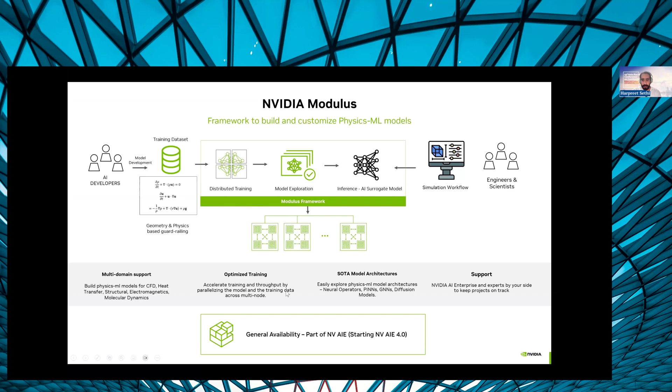And this package is available as a part of what we call the NV AIE license. And also this package is open source. A lot of different research organizations and also people in the industry have used this package to develop different solutions. In the energy industry, people have used it for wave simulation, CCS problems, and here you see some wind farm simulations and heat boiler plants. And there's a lot of work we did in the climate and weather space.

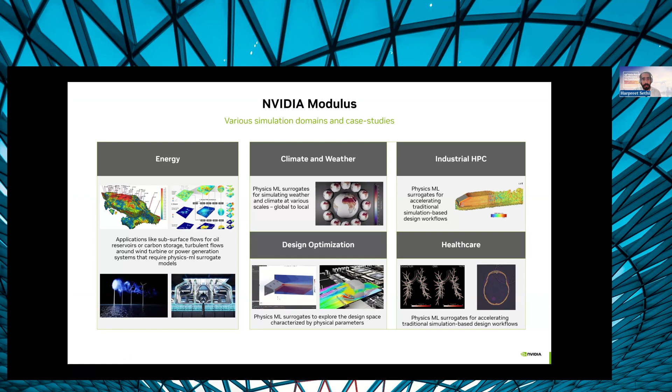And this has also been used in our own internal research for designing chips and heat sinks, and in medical healthcare, like blood flow simulation, MRI imaging, and also CFD simulations around cars. So there are many different fields where this package has already been adopted. There are a lot of examples available in this package you can use as a starting point. And I will point the link out at the end with the GitHub.

On one end of the spectrum, you have fully physics-driven models called physics-informed neural networks, and on the data-driven side, one of the models I'm going to talk about is graph neural networks. But we have other models available: neural operators, diffusion models, physics-informed graph neural networks, physics-informed neural operators, and many more. And we are also planning to release maybe one or two foundation models for simulation purposes. So it's an evolving package with a big team behind it, but it's still open source, so anybody can use it to accelerate their own research.

So now coming to this one particular model called graph neural networks. I'm going to start with what these graph neural networks are first. You might be familiar with normal neural networks. Basically, graph neural networks are just a way where we use a normal neural network and adapt it to a graph type object.

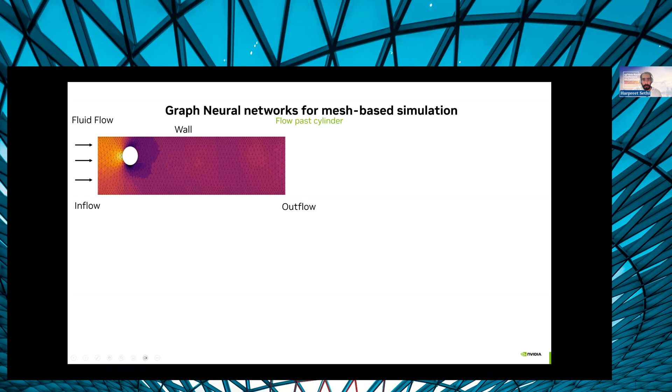So how can these graph neural networks be used to develop surrogates for mesh-based simulation? The first step is you have this information available from your numerical simulations. As I mentioned earlier, this is a data-driven approach, so you need to generate simulations for different types of meshes. Assuming that you have some simulations available, you have pressure and particle velocity information available.

In this case, we also have another feature called node type. A node type is a one-hot encoding vector. It tells you where the node lies, whether it's close to the inflow region, outflow region, wall region, or interior region. So we have four classes. If it's close to the wall, I'm going to put my node type vector as 1000. Depending on which region it is, I just change the 0 to 1 for that region.

Other information available from your numerical simulation is the position vector, so you know where each node is located. The first step is how you encode this information on a node or on an edge of a graph. In this case, we encode pressure, velocity, and node type as node features, and the positional information as the edge feature. I won't be able to go into detail on exactly how a graph neural network works, but I'll mention some important points.

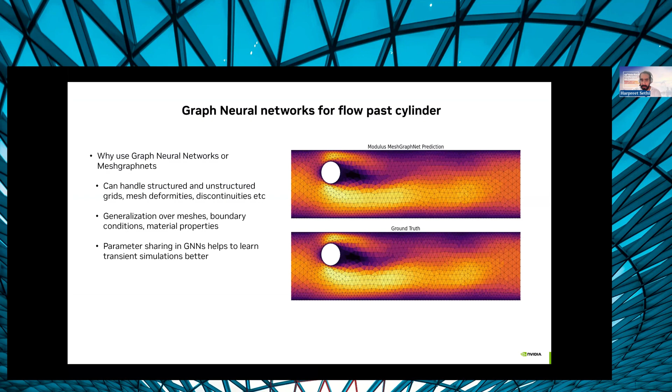So one of the main reasons is it can handle unstructured grids and very complex meshes. You are trying to adapt to unseen meshes, so you can handle deformities, cavities, and faults. In CCS, we are interested in faults and fractures, and these are really suitable for very complex meshes. You can generalize over meshes, different material properties, different boundary conditions, and these are also very efficient methods. So these are some of the reasons why we chose graph neural networks over other ML models, and the main reason was the ability to handle these unstructured and deformed meshes.

So now coming to the CCS part of the presentation, why it is important for NVIDIA and NETL. And the reason is because of the climate task force goals.

And so these are some of these goals toward basically decarbonizing, and that is the reason we started looking into how AI can be used for CCS applications, and how we can monitor our reservoirs and keep the CO2 stored safely in our reservoirs.

And these are more details on the actual site that we used to train our AI-based surrogate models for CCS. So this site is actually based in Illinois State in the US. And this is actually a real site where people have injected almost 1 million metric tons of CO2, and the actual depth of the reservoir where we are storing the CO2 is roughly 7,000 to 8,000 feet deep. And we normally store this in a thick and porous sandstone.

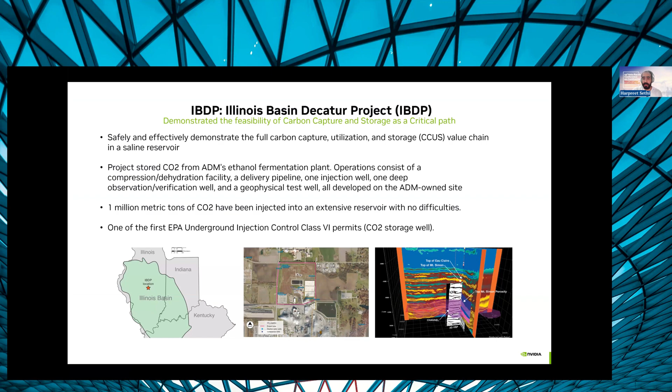And these are some numerical details on the type of grid that is involved. So it's not a regular grid. You can see it's a tartan grid. This is a deformed type of grid, but eventually we want to be able to handle faults and cracks and these types of grids. So that was the reason we chose graph neural networks.

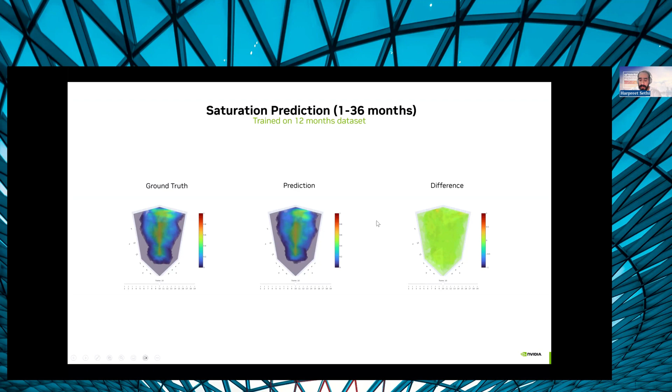So in this slide, it shows you how accurate our graph neural network was in comparison to the numerical solver. So in this case, we only tried a vanilla graph neural network. These are the results from maybe the beginning of this year or end of last year. So this was one of the first experiments where graph neural networks were tried on a real data set, and we only achieved an accuracy of 93%. But now we have developed more advanced models called graph transformers, which are also available in Modulus.

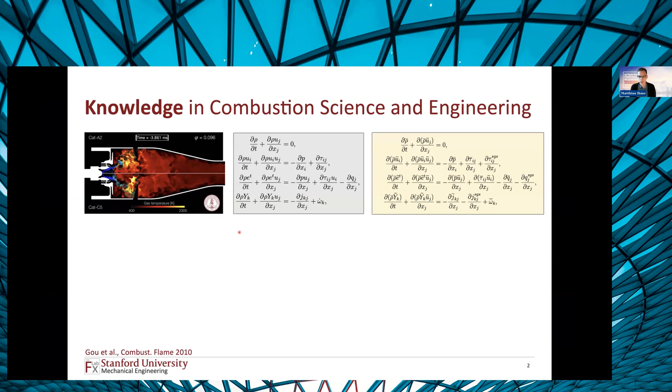What I'd like to present is a couple of snapshots on the general topic of machine learning or AI for combustion and energy. And I want to start out by reminding us that in our community, more broadly energy conversion and sustainable energy utilization, we actually have quite a bit of fundamental knowledge of the governing physics. And this is reflected here on this slide, where I'm showing examples of governing equations that are used to describe complex fluid flows.

The challenge, of course, despite this very fundamental knowledge, arises from its practical implications. If you look at one of these gas turbine combustors here, you observe that there are different physical processes that come into play. In addition to this, if you consider turbulent reacting flows, we have to deal with multiple length scales that go all the way from the molecular scales to the system level scales, and covering this with conventional CFD simulations introduces a challenge.

Apart from this, if you're looking to these equations, which are essentially some filtered form of the equations, you are observing that there are a number of terms appearing that are essentially just a consequence of our averaging procedure. So this is typically referred to as subgrid scale terms that require modeling.

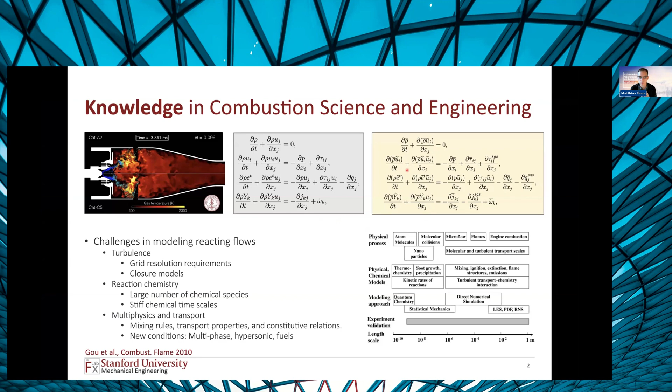So based on all of these physical processes, we can really think that the scales, unclosed terms, and the multiphysics constitute a number of challenges for which we have some understanding, but we really believe that data-driven methods can help us to make a leap forward to tackle some of these processes. And what I'd like to show you in these few slides is some approaches for dealing with some of these challenges.

Apart from this, what we're also recognizing is that there are more and more sensors and diagnostics coming online that are useful for diagnosing combustion performance, and this adds some additional opportunities for us. And lastly, of course, our extensive database from experiments as well as simulations can be utilized to extract additional knowledge and perhaps tackle some of the challenges that I mentioned before in terms of scale separations, multiphysics, and unclosed source terms. So by and large, the question then is how can we combine our existing knowledge and available data in order to make a leap forward.

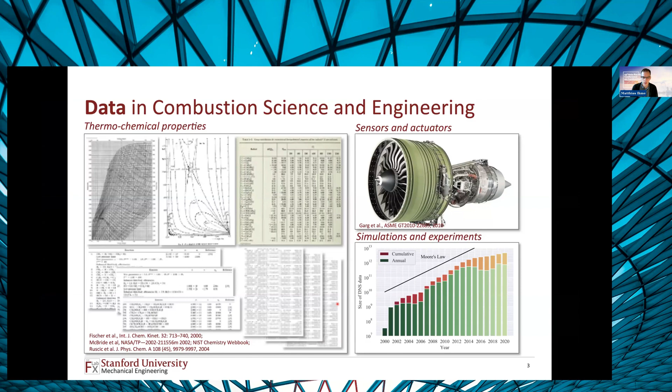And what I'd like to do here is to show you a couple of snapshots on different aspects. The first one is essentially a data and open source community-driven approach, where we're really thinking that this data that is available, typically dispersed within our community, should be combined so that we have access to this data for numerous data-driven methods. Depending on the time, I want to briefly touch on the use of these large data sets for extracting physical knowledge. And then I want to give you some ideas on how we can combine physical understanding and data-driven methods in order to tackle problems for which we have very limited capabilities to comprehensively investigate those.

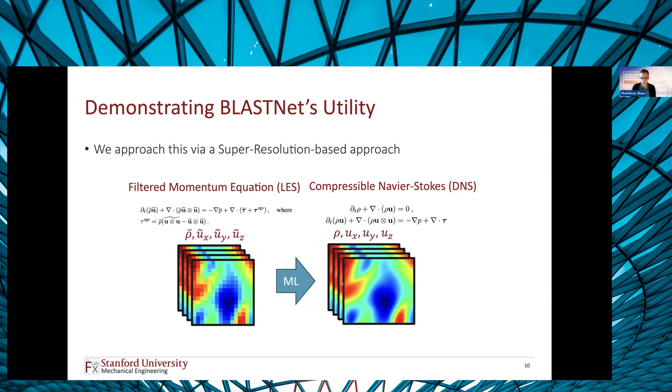What you're finding is that if you're using this BLASTNet dataset with one particular subset of data that we refer to as momentum 128, we can filter this data at arbitrary order and obtain information about the diversity. The diversity is a good indicator of how spread this data set is.

And this alludes to this idea that if you're developing a machine learning model, it provides you access to general data. And if you have a diverse data set, we're not running into the issue of potential extrapolation errors or hallucinations. So diversity is really helpful, especially if you're thinking about developing machine learning models that are generic, that are applicable to a wide range of operating conditions. And this is where we think that this BLASTNet dataset provides quite a bit of value.

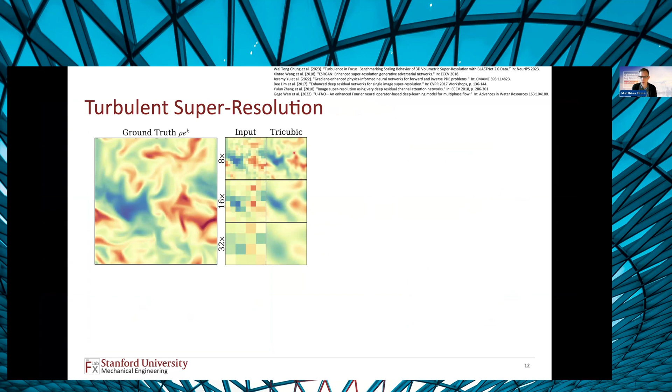And if you're doing a naive tricubic interpolation, that's kind of a standard approach, we are recovering some of the solution fields. What you can also do is train a number of different machine learning models. They have different acronyms, residual and residual dense blocks.

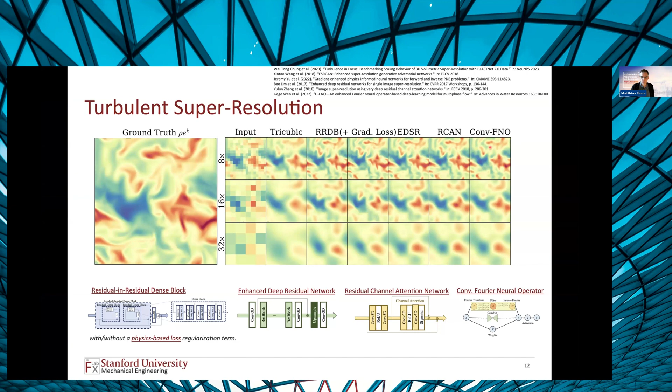We have the enhanced deep residual network and other formulations all the way to a Fourier neural operator. Now we can test the performance of different models, and we can ask questions how different models scale with regard to the number of data that we provide, or how the different machine learning models scale with the size of the systems or with the number of degrees of freedom. And I think that's really an exciting opportunity for us to look to asymptotic limits in different machine learning techniques, right? Again, illustrated here, just one snapshot of this.

Just as a side note, if you have a singular data set, you cannot test this because you're ultimately running into the issue of overfitting your machine learning model, right? So the results that we're getting are quite exciting because you are now able to observe trends, asymptotic limits, and this is essentially in performance metrics where we can now assess asymptotic performances of different models and really nudge towards this idea of generating foundational machine learning models for combustion.

Okay. So with this, let me briefly summarize here. So BLASTNet is a community-driven effort in order to bring data from diverse data sources, most notably from high-fidelity DNS simulations, in a central repository where we as a community can use this for different machine learning tasks. There are clearly opportunities to grow this data set in different directions. Currently, it's mostly focusing on turbulent fluid flows and turbulent reacting flows, but we could equally envision that this expands to experimental data as well as biofluidic flows, environmental flows, and related applications. Right. So I think this is a really exciting perspective, and I encourage everyone to consider contributing to this database.

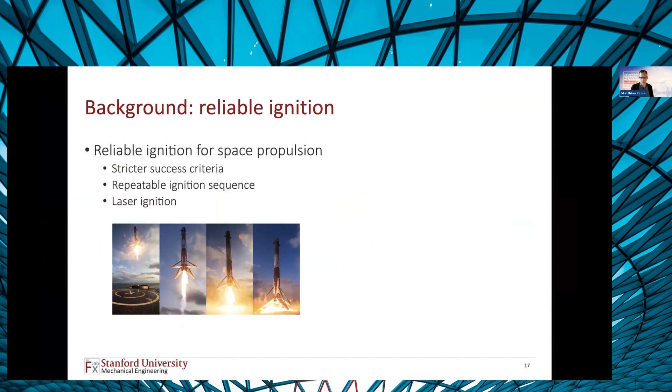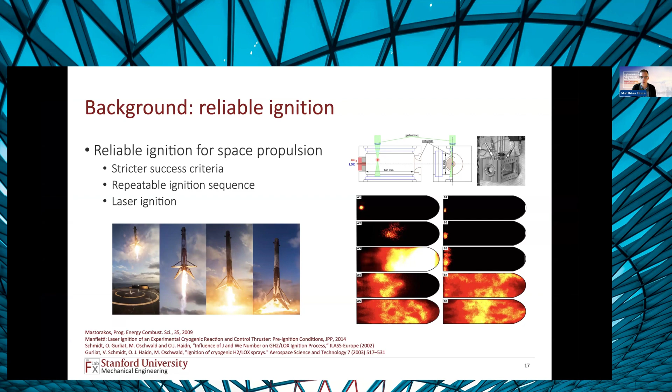You can imagine that if you're igniting in regions where you have only fuel or oxidizer, ignition is very unsuccessful. And so what we're trying to find is predictive methods on how we can position this laser, this ignition source, so that the ignition is always 100% guaranteed. Okay. So it turns out that if you're doing these kinds of experiments, it is an extremely challenging combustion environment, and you typically have only access to a few experimental data. So in our case, these are on the order of a few hundred unique experiments.

But at the same time, if you're thinking about performing high fidelity simulations, again, we are limited by the number of ensembles that we can access, right? So we kind of have a limited data set and we have limited computational capabilities. And then the question is, how can we marry both in order to get an ignition map with minimal availability of data, right?

So this is really extrapolations in the sparse data limit. And what I want to show you here is an interesting attempt to combine this so that we have predictive accuracy. Right, so what you're finding here is, as I said, ignition is limited by the turbulent mixing, by the unsteadiness and the stochasticity of the combustion process.

And what we would like to do is combine single or sparse high fidelity simulations. And this is shown here on the right-hand side. This is one CFD snapshot of cold flow simulations. This essentially provides us the fluid dynamics and the flow field behavior. In addition to this, we have sparse experimental data.

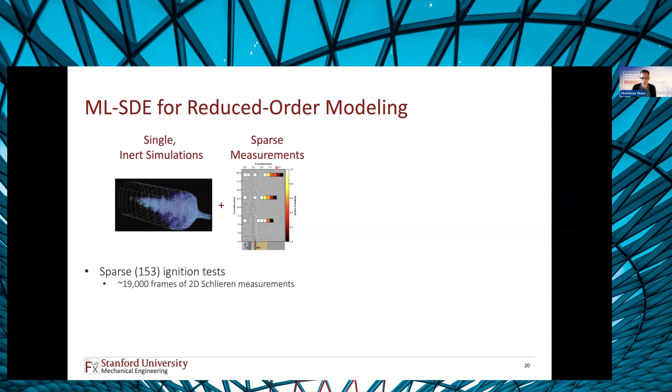You're seeing here essentially the rocket combustor, and we're injecting oxygen, and the shear layer is the methane injection. And each one of the symbols is one unique experimental data set. So you're seeing already, this is clearly a sparse data set. And we want to combine this in such a way that we can predict the entire ignition map for this case. Right, so in total, we have about 150 ignition tests, and we have one three-dimensional LES calculation.

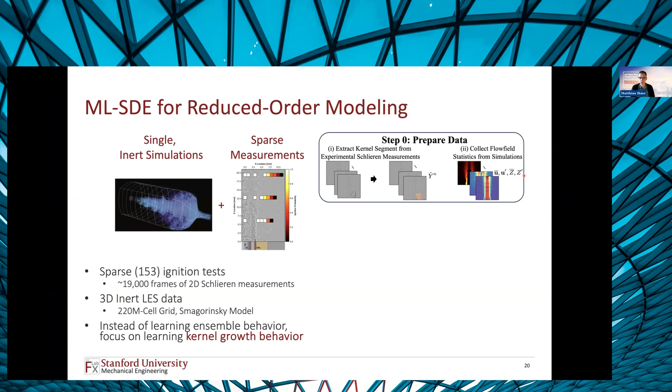And then we want to combine this with our CFD simulations to extract some of the characteristic flow field behavior, most notably the velocity field and the scalar mixing quantity, which are essentially the most relevant quantities to predict the scalar mixing and the flow field behavior. In the second case, we're combining this in a two-step model, and it is essentially a hierarchical modeling approach where we're combining both a classical machine learning technique with a physical model.

This is illustrated here. So the first one is a classical UNet, which essentially allows us to predict the geometry of a particular ignition kernel, right? So we are essentially taking this initial state, this red curve, and trying to predict the next instance after the evolution of this ignition kernel. What this machine learning technique is not able to do is to provide the dynamics. So we're not able to extract the convective behavior of these ignition kernels or the mixing.

And for this, we're using essentially a physical model. This is here expressed in the form of a so-called stochastic differential equation. So what we're doing is we're essentially advancing this ignition kernel, here expressed in terms of the center of mass, by some convective velocity and some stochastic behavior. And those quantities essentially are calibrated from our physical closure model.

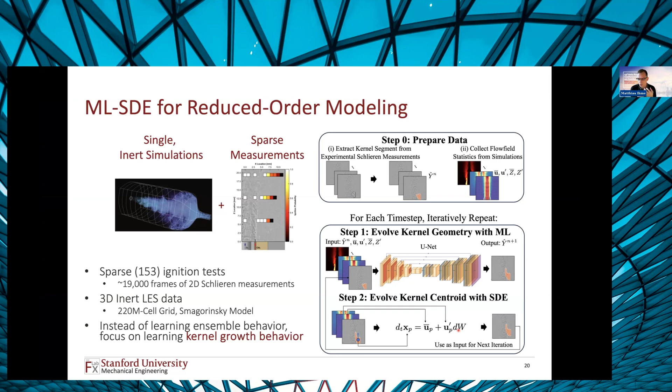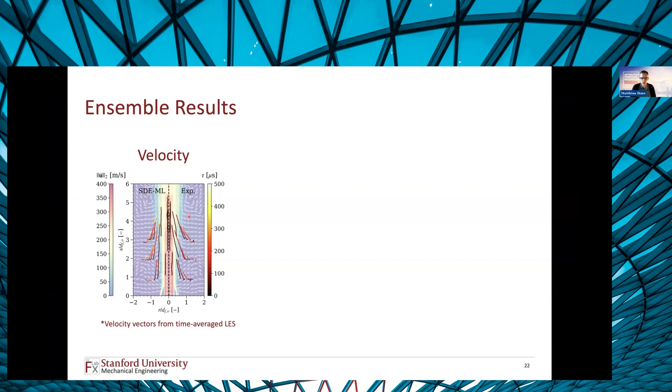The real question that we're asking is, can we also apply this to our ensemble simulations and essentially extrapolate within our combustor system? And this is nicely illustrated here on this slide, where we're showing on the left-hand side the machine learning model, this SDE-ML model, where we are identifying trajectories. And this compares very well with experimental data.

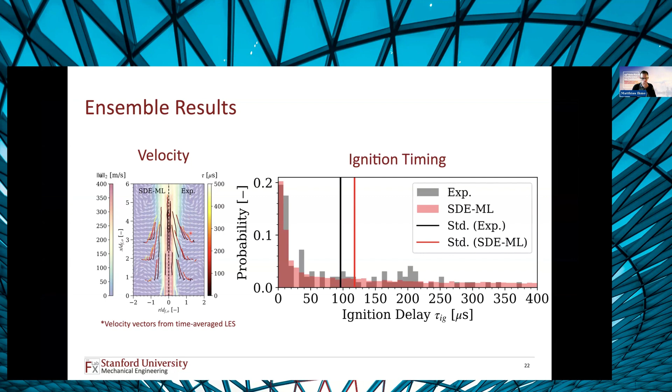If you're moving on to quantify this, you're finding that our model is within 5 to 10% accurate in predicting the ignition delay time, or more specifically, the time to ignition. So overall, the model captures all of the behavior. The really interesting question is that we want to also populate ignition maps.

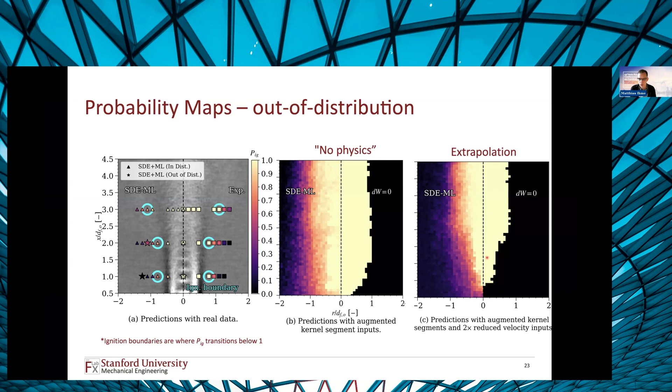So overall, I think the model captures some of the key features that we would expect by our intuition, and I hope I conveyed the importance of introducing some physical knowledge so that we are accounting for some of the turbulent mixing. So with this, let me show you the summary. So what we presented here is a modeling approach where we're combining physical knowledge and machine learning techniques in the sparse data limit in order to predict some stochastic ignition events that are particularly relevant for a number of combustion problems.

With this, let me summarize here. So I try to give you a little bit of overview about trends in this direction that I think is quite exciting. Most important is the use of data and making this data available to the broader community so that we can really advance this field and leverage some of this experience that we have observed in other fields. And then I showed you one interesting example on how we can combine both experiments and simulations in order to predict stochastic ignition events in the sparse data limit.